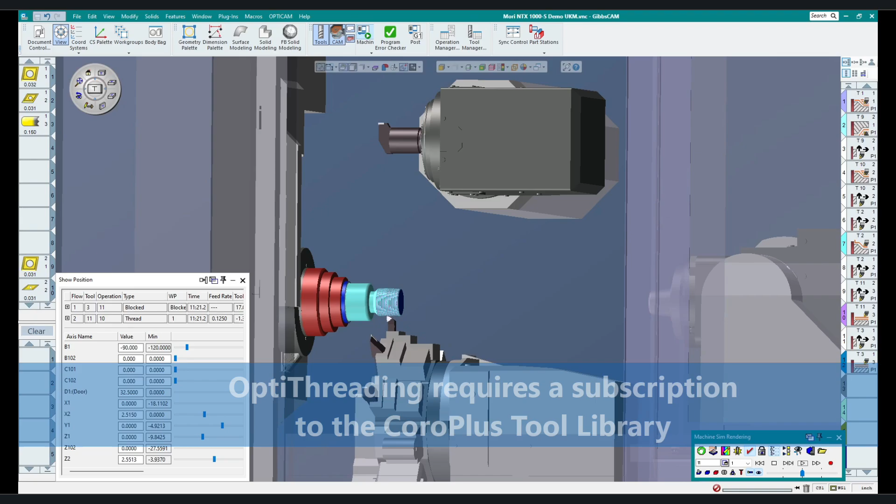Now keep in mind, in order to generate this toolpath, you do need to create your tool in the CoroPlus Tool Library, which does require a subscription. This is where the cutting data we need for this process is stored, so make sure you've got that squared away first, otherwise you won't be able to create the OptiThreading toolpath.

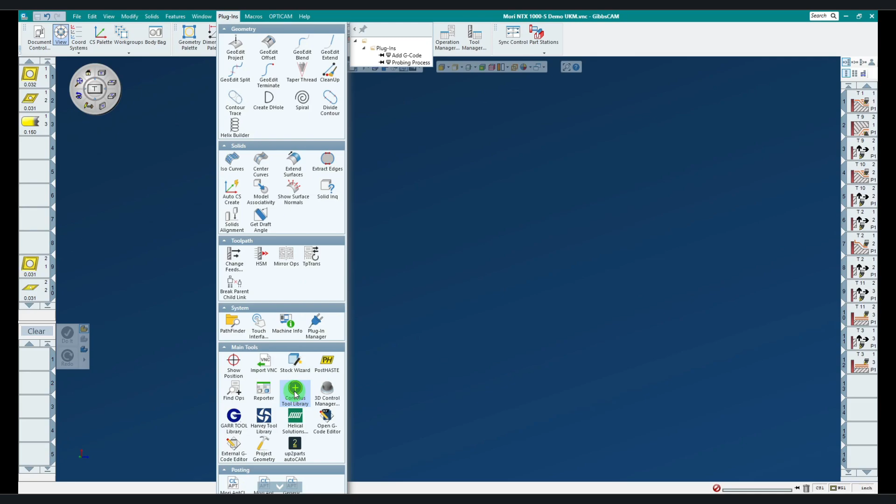Now, once you've got your CoroPlus subscription set up, you can log into it while in GibbsCAM by selecting the option in the Plugins menu at the top. So I'll go up to Plugins, and then down to select CoroPlus Tool Library. That's going to open up another window, and this is where you would typically log in for the first time, but I've already done that, so we just wait a few seconds here and it will load my library.

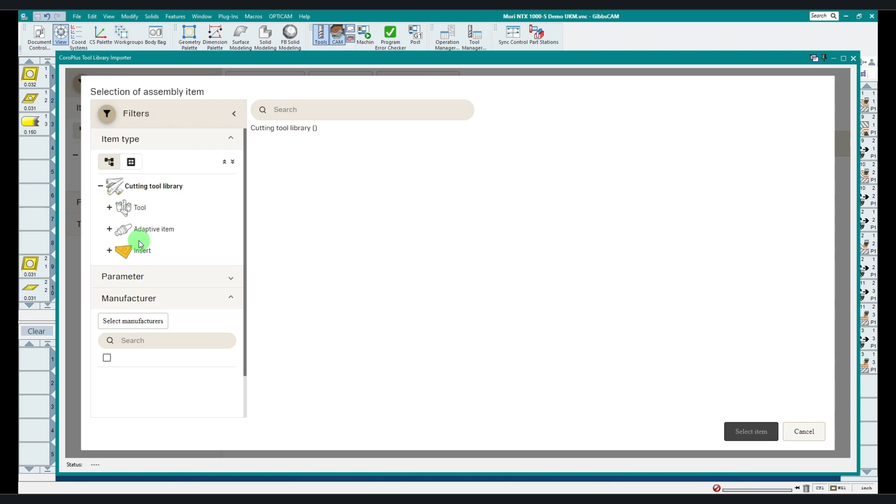And once that comes up, I can click on the New Assembly button to build a new tool. That's just going to load the CoroPlus Tool Library catalog. And here on the left, we've got a couple of options we can go through to help narrow down our search. And I can go choose Tool, Turn Tool, Thread Turning Tool, External Thread Turning Tool, and then just the only option within there, and that's going to narrow this down for us.

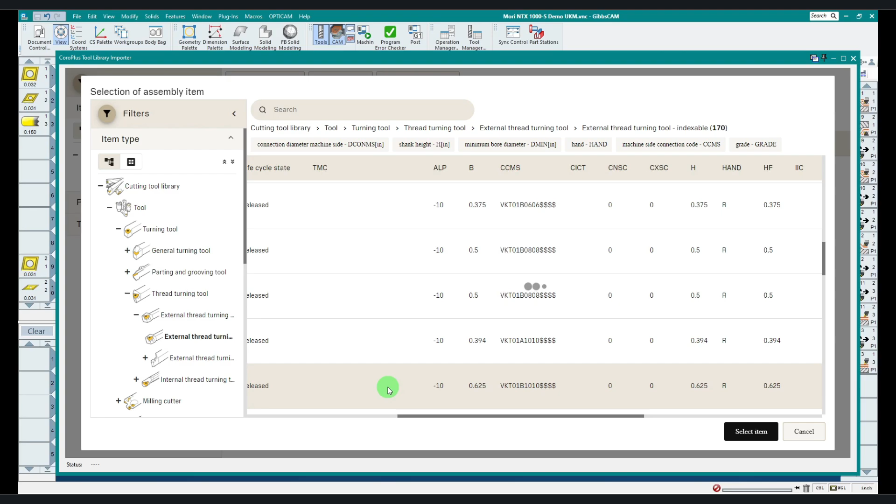And then I've got a couple of other parameters I could look at. Maybe I want to choose the direction here. I'll find the first right-handed one. There we go. And then B is the shank size, so maybe I'll find, say, 5/8. This one looks good. I'll click on this one. It's going to load some information about it. I'm just going to choose Select Item.

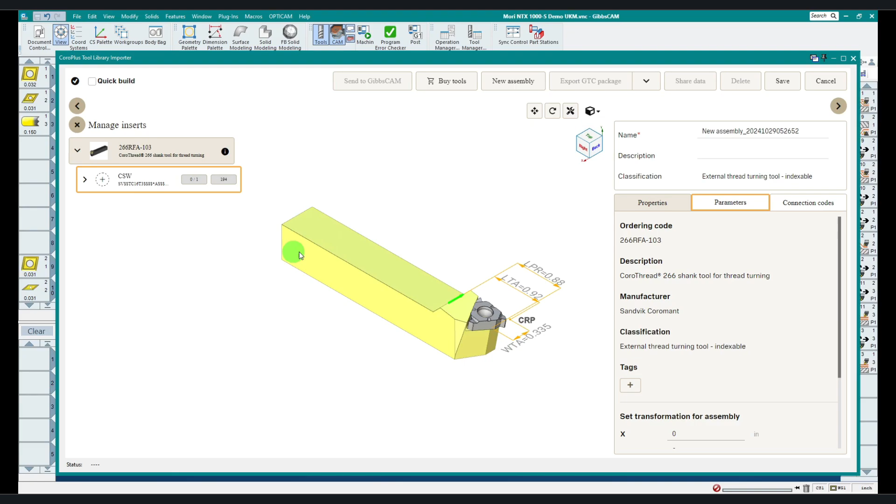This is going to load it into the assembly page where we can add an insert to it once it appears. And when it does, finally, we can click on the little insert icon right here. And that's going to show us that we've got 194 options for this holder. So I'm going to click on this button. And it's going to load the catalog once again, but this time just with inserts.

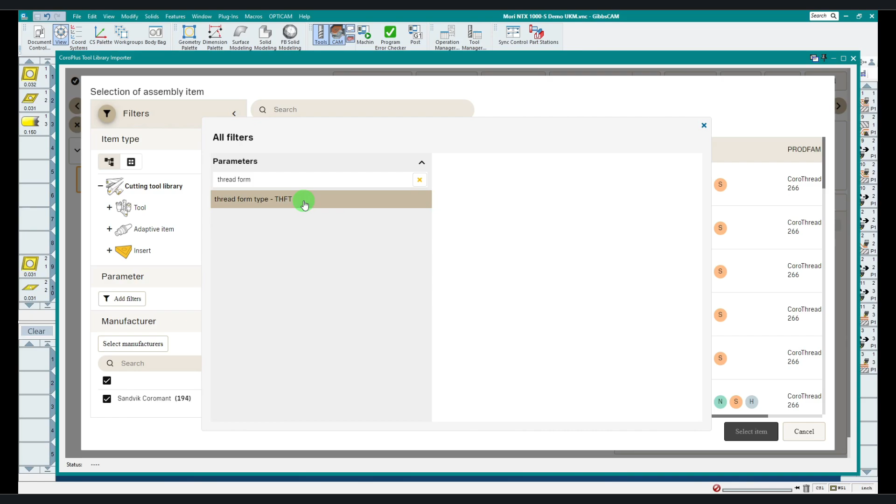Now there's a parameter option here where you can add filters and go in and search by maybe TPI. Choose a number there and hit apply, or even thread form type. These are usually the ones that I use. Or you can choose what style of thread you're trying to create. Or of course, you could just go through here and look at some of these parameters and pick one.

I'll just grab this one right here, random, see what we get. And while it's building this model and loading the insert into it, maybe I come over here and give it a new name. Call it maybe OptiThread Tech Tip.

You could even put description stuff in here, insert number, holder number if you prefer. But once you've got everything typed in, go ahead and click the Save button at the top. That's going to generate this GTC package and save our assembly. Now take note that while we wait on this to save, there's only 3 tabs available right here in this little window. But once this finishes, a 4th tab will appear, and it will be the Cutting Data tab. And that's where we can apply cutting data to this tool.

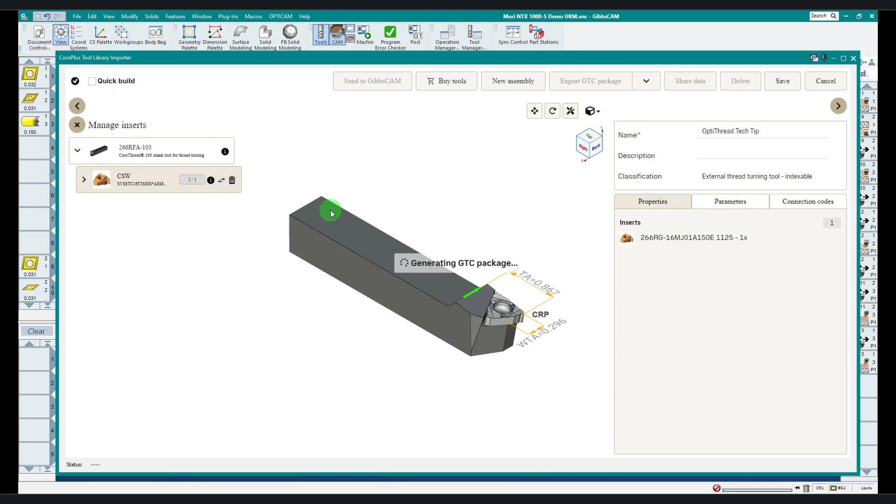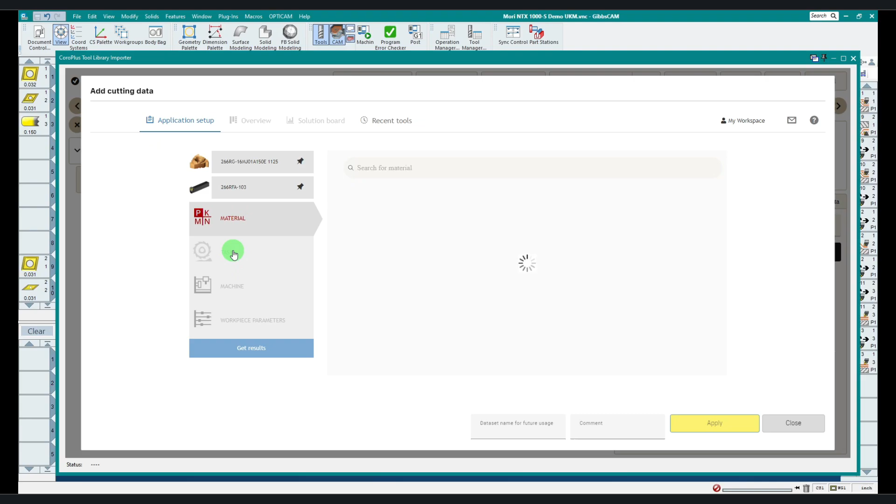Now I'm going to go to the Cutting Data tab, and of course we don't have any for this tool yet, so we can specify our own and manually enter the values if we know them, or we can get recommendations. So I'm going to click Get Recommendation, and build some parameters for my application here: material type, task, which would be external thread in this case, the size of our machine, and some thread parameters.

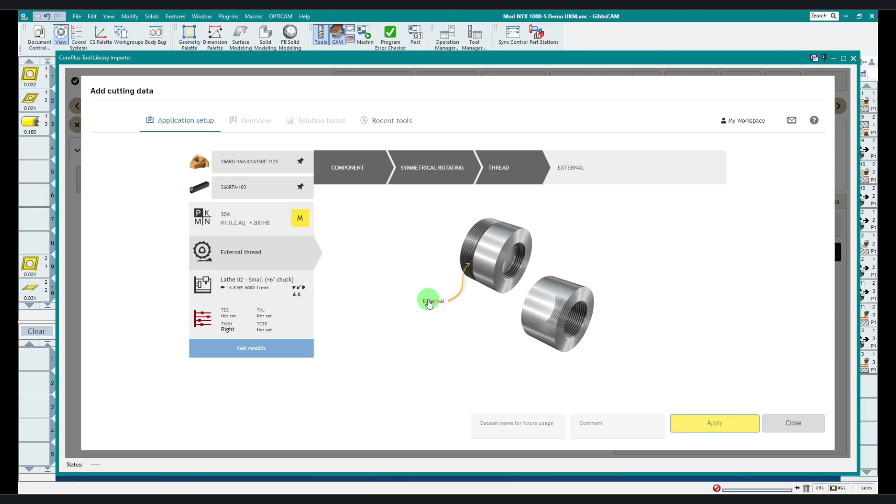Here on material, I've got Sandvik reference materials, but also recently used. If you go to the reference materials, these are all the families that you can search through and narrow it down, but I'm just going to go with recently used and choose 304 stainless steel. I'm doing an external thread, and I'm just on a small 6-inch chuck lathe.

And now we can build some parameters for our thread. Now I can choose the standards that come with the insert in the CoroPlus Tool Library, or I can define a custom thread size, which is what I'm going to do.

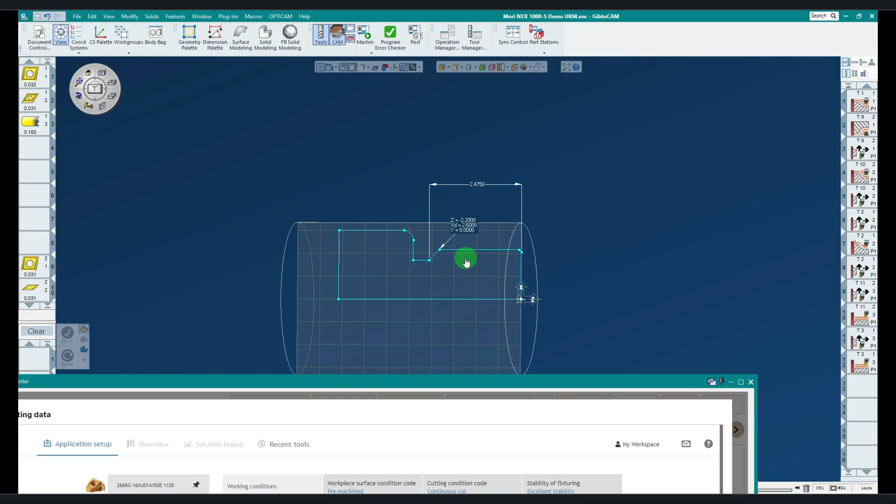Now I'm going to build it based off of my part that I have here that we watched in the rendering, and it's a 2.6 nominal diameter and about 2.5 long. One thing to keep in mind always in the CoroPlus Tool Library is whether you're working in inch or metric. So for the diameter, 2.6, it wants metric, which is 66.04 millimeters. I'll hit the enter key and it populates both of these boxes with that.

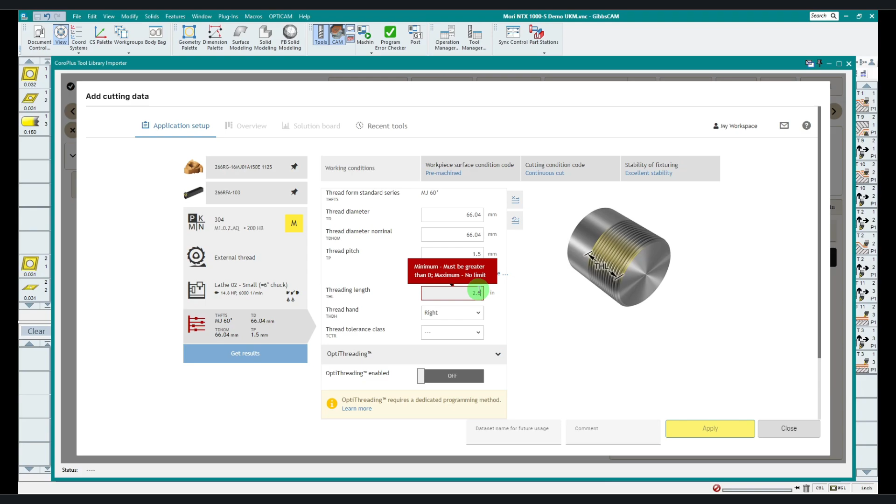The thread pitch is always applied because of the insert. And now I need to apply a thread length, which is standard in inch, so I'm going to just enter 2.5. I'll, of course, choose a tolerance - 6G is the only one available. And then I'm going to enable OptiThreading by clicking this button here.

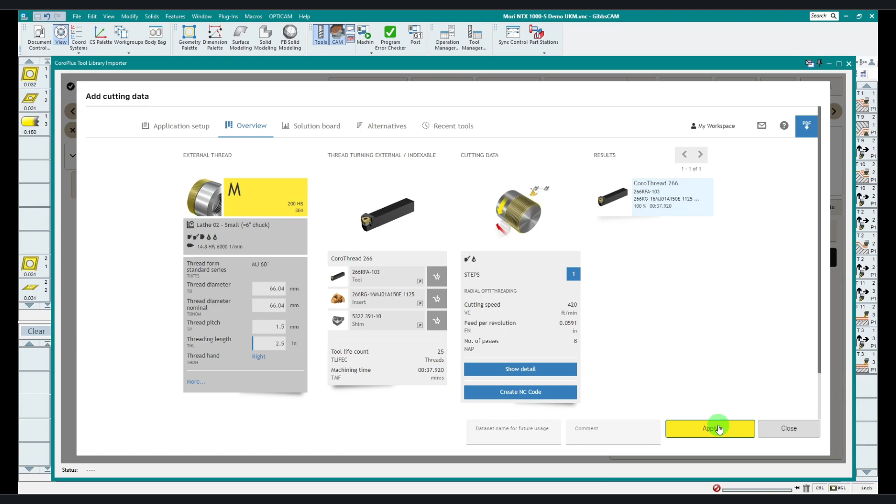And once you've got all of that set up, you can click on Get Results. And once the results appear, you can click Apply. And this is going to apply that cutting data to this tool.

And once you've got that, you can click on Send to GibbsCAM. Now when you click on this, it starts to export, and it's going to open up another little window that lets you choose an insert direction. So this tool's going on a lower turret, so I'm going to choose this option here. Go ahead and click OK.

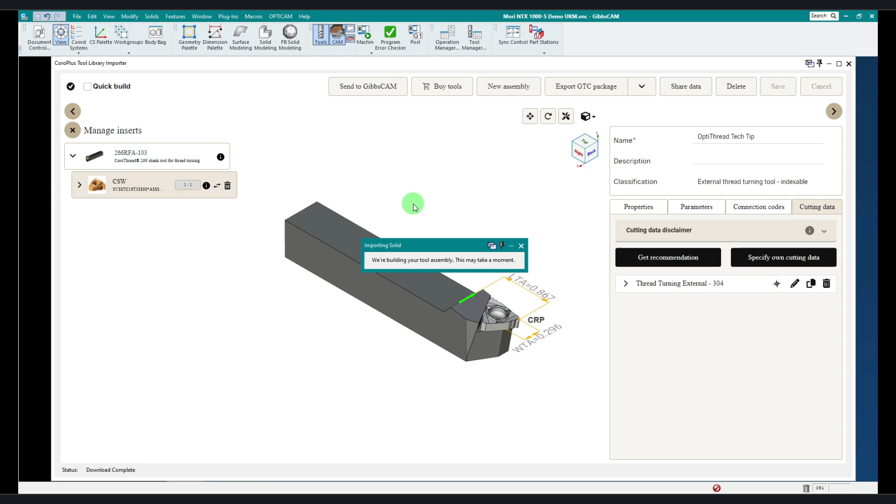It's going to add the tool to our tool list, build the assembly, and once that's finished, I'm going to close the tool library. You can minimize it or close it, and notice it imports the holder. No insert here, but the holder is here. So I'm going to open up that tool, and there we go. It's in a tool block in the holder that we applied for it.

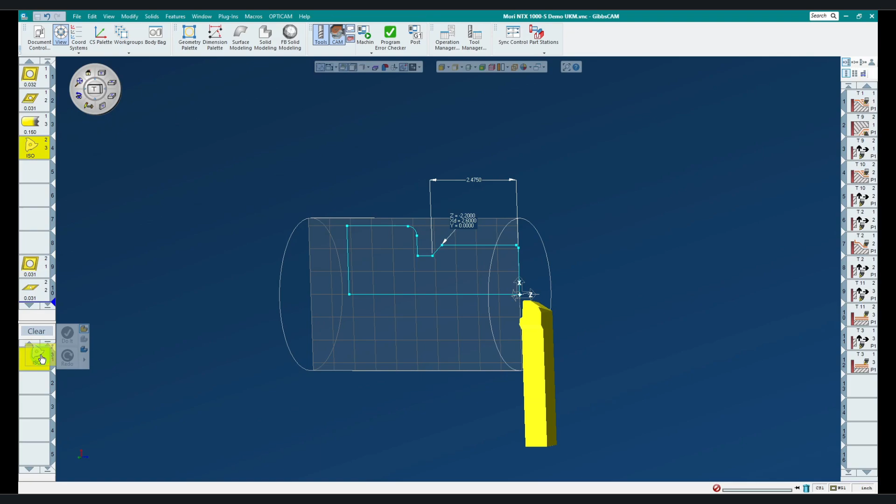So now we can take that tool, drop it down on our process list, and choose a threading process. Now this is going to load a typical thread process, and you're probably familiar with definition options here from parameters and from shape. Either you want to use from parameters and apply these values here to drive your thread, or from shape and you use machining markers to apply a start and a stop.

But of course now, since we're using a tool that has OptiThreading enabled, we have from cutting data, which when you choose that, it shows external threading OptiThread forward. It applies the length that we entered in the parameters. It automatically creates our number of passes. It's got the diameters locked down.

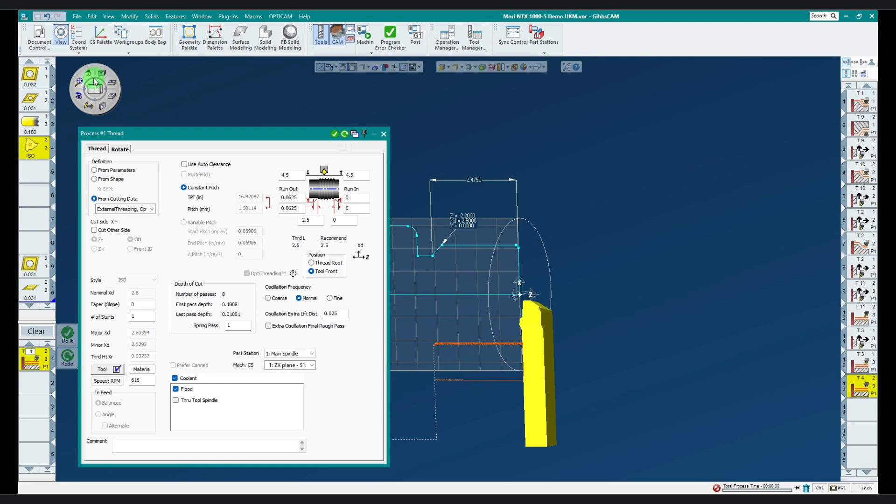So really all that's left to do is hit the Do It button. And you can see we get our OptiThreading toolpath. I'll zoom in and you can see these oscillations that are pretty exaggerated, but that's because I've got a 25 thou extra lift distance. If I put this at 0 and hit redo, you can see it's definitely not as aggressive. So you've got a little control over it, but for the most part, the tool and the tool library build the parameters and the process for us.

So that's basically it, going over building a tool in the CoroPlus Tool Library and then using that to apply it to OptiThreading toolpath. If you would like to know more about OptiThreading or any other aspect of GibbsCAM, please feel free to reach out to your local reseller for more information.